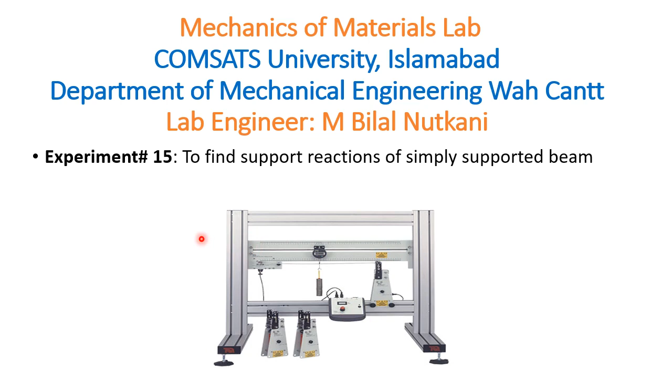Before starting the experiment, you are advised to follow these safety checks and visually check all the parts including electrical leads. These are electrical leads and power cables to connect with 220 volts. Check the power cable, electrical connections, and all the parts relating to the sensors to ensure they are in proper condition. Check all the components are secured correctly and fastenings are sufficiently tight.

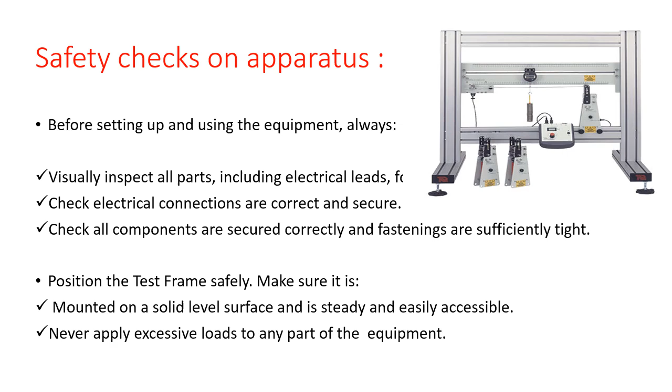A beam is a structural member designed to support forces acting perpendicular to its axis, so the forces will be perpendicular. There are types of beams. Here is the simply supported beam, which you can see is free on its supports. Here are 2 supports and the beam is free to move, so this is a simply supported beam.

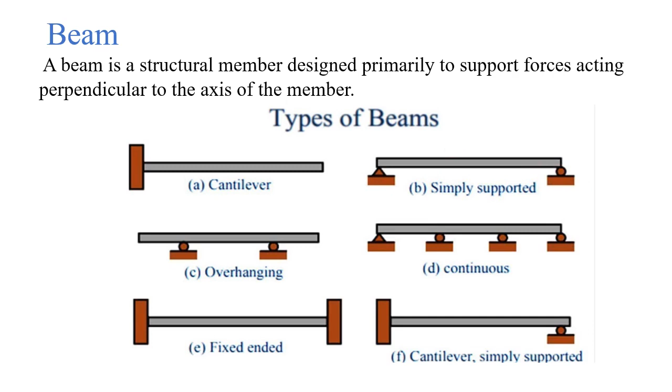This is our apparatus for the experiment, and here is the beam. See the components: this is the frame which stands on the workbench, and here is our apparatus fixed in this frame. This is our beam, and we apply loads with the help of this hanger. We apply small weights on this hanger, and this applies the load on this beam. This is the digital indicator which shows the deflection of the beam. When we apply the load, the beam deflects and it shows the deflection.

Here is the digital force indicator. This is connected to the end of the beam, and it shows the digital force produced in this beam due to this hanger and the weights we apply at this point. This is the moment chuck. There is also a sensor connected, and this is the support, with the support there is also a sensor, and this sensor measures the reaction force of this beam. We will perform the experiment on this apparatus using the simply supported beam.

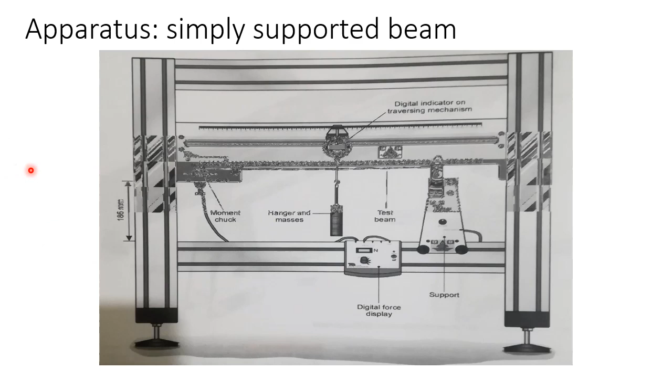This is the procedure to measure the reactions of simply supported beams. These are reaction forces, and we will measure these reaction forces when we apply this load W on the beam. We will measure reaction forces of the simply supported beam at both ends.

In the first step, we will start the computer and software and enable the virtual experiment mode. In the second step, we will select variable hanger position, because we will vary the position of the hanger along the length of the beam. In the third step, we will place a load of 4.9 Newton, selecting this load to apply on the beam at various positions.

We will apply this load at a distance of 40 millimeters from the left end, so length A is 40 millimeters. We will apply the load at this point. When we apply this load, the data will be generated as the result of force application and recorded by the software automatically. We will calculate the reaction forces theoretically using the moment of this beam, and we have the distance.

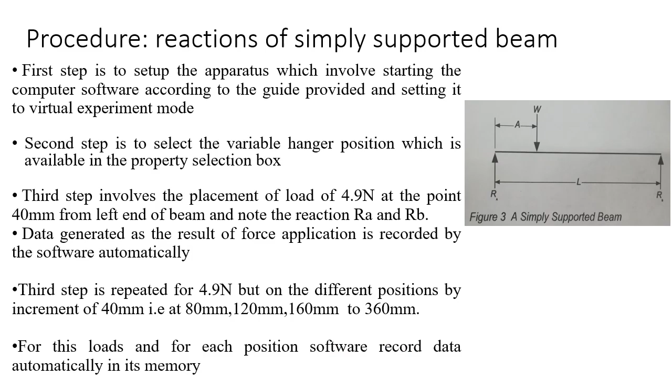Now we start to perform this experiment, and we will verify the basic beam equilibrium equation, which means the reaction at this spot and reaction at this spot - the sum of these two reaction forces will be equal to the applied load. We will verify this by the moment principle.

Initially we enable virtual experiment mode and variable hanger position. We select 500 grams, which produces 4.9 Newton, and apply this load 40 millimeters away from the left spot. This is 150 millimeters and this is 190 millimeters, so the relative distance is 40 millimeters from the left spot. You can see here the reaction forces: 4.41 Newton on the left and 0.49 Newton on the right end. These are the reaction forces.

We can cross-verify this by the principle of moment. We know the distance and the force we apply by means of the hanger, 4.90 Newton, so we can verify these values. We will record this data.

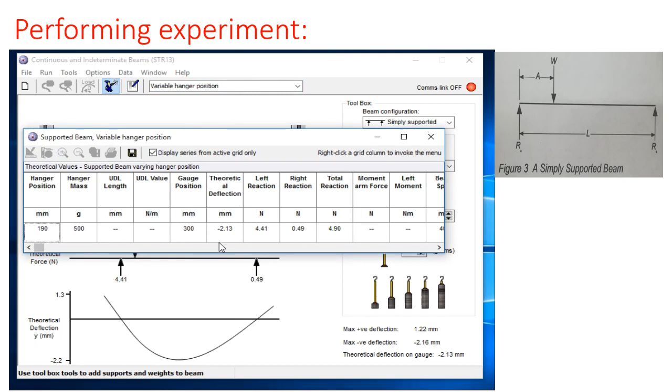This data is generated. We applied the 500 gram mass, and you can see here the deflection. This gauge measures the deflection of the beam, and these two spots measure the reaction forces of the beam.

Now we will apply this load by increments of 40 millimeters towards the right spot, applying the hanger at 230 millimeters. You can see here the deflection changes, and the reaction force also varies - it reduces at one support and increases at the other to some extent due to the variation of load position. This is 4.9 Newton again, and you will verify these reaction forces theoretically.

Again we move this load by an increment of 40 millimeters, applying it at 270 millimeters. Now you can see again the reaction forces vary while the load stays the same, but the position varies. We'll record this data again, and now move by an increment of 40 millimeters to apply at 310.

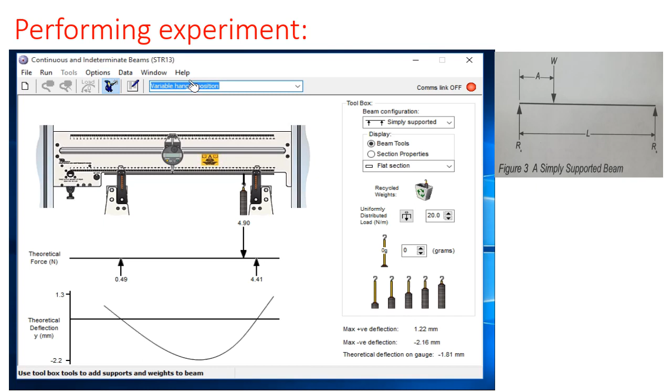This is the task to do at your end. First, in this experiment you will verify the basic beam equilibrium equation: the reaction at the left end RA and reaction RB will be equal to the applied load W. You will find these reactions RA and RB using the principle of moment. You have a known distance and known applied force, applied using mass with the help of hangers. So you have the mass and load, and the distance, and you will measure RA and RB using the principle of moment. Then you will compare the theoretical values with the results obtained experimentally and plot the graph with percentage error.